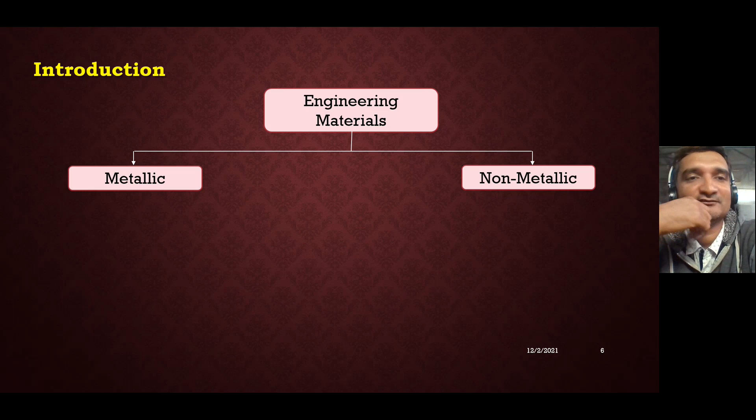A number of materials are available, like engineering materials classified into metallic materials and non-metallic materials. So we are going to discuss non-metallic materials. Here is the introduction and classification of non-metallic materials.

We have non-metallic organic materials and inorganic materials. Further classification, we can go to polymer and others in organic materials. Further, we can classify the polymer material into thermoplastic, thermosetting plastic, and elastomer.

And the other is inorganic material. In inorganic material, there is a classification by which we get ceramic materials, glasses, and others.

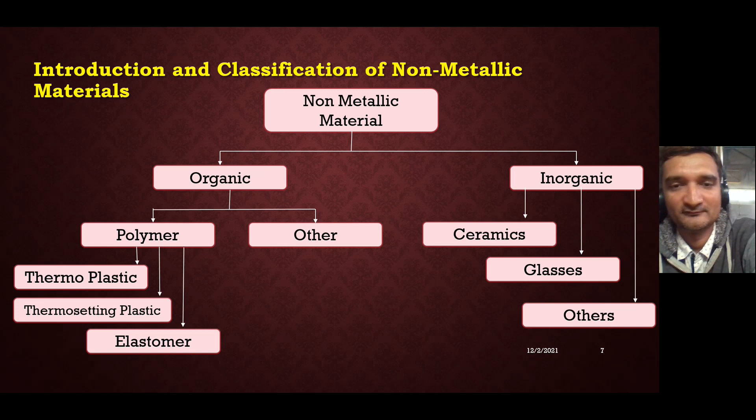So we have discussed today's chapter in non-metallic materials. Mainly non-metallic materials used in industries are ceramics, abrasives, plastics, plywood, lubricants, porcelain, adhesive, rubber, insulator, glass, cork, refractories, cements, and a number of materials used in engineering practices.

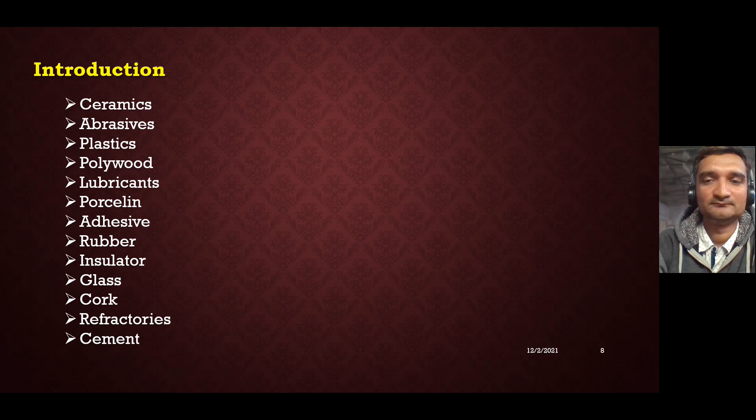Here is why non-metallic material is important for the engineering field. Non-metallic materials have less ductility, less strength, and less electrical and thermal conductivity, but the main important thing is they are less costly and have good fabricability.

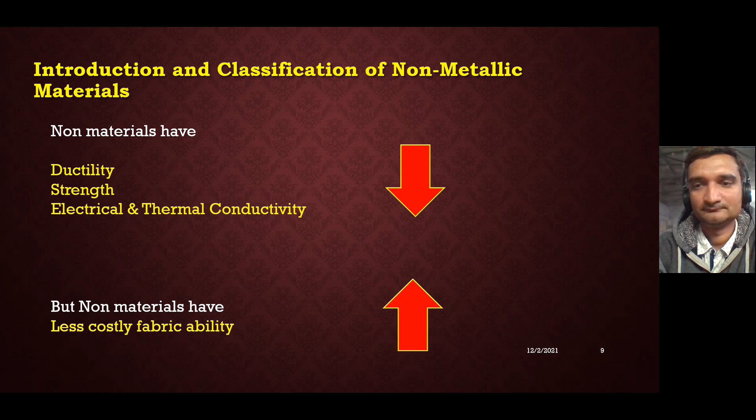So this is the plastic characteristics. Plastics have low weight and cost, and have good molding and finishing properties. It is non-poisonous and non-smelling.

We also have to recycle some plastics. This type of plastic we can recycle a number of times. But the plastics namely like LDPE, HDPE, PVC, PP, and so on are available in the market.

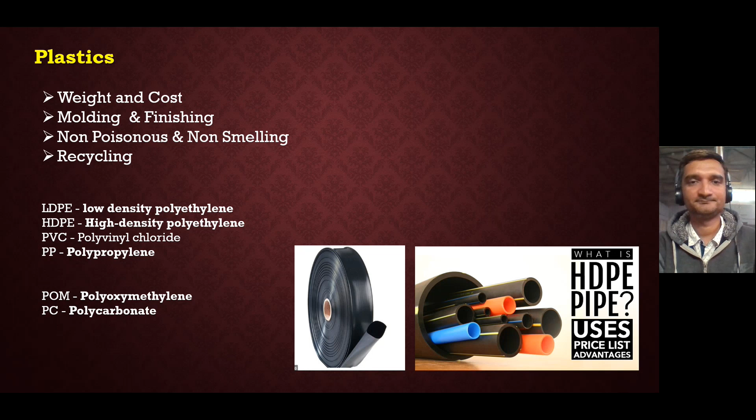This is the CPVC pipes, UPVC pipes, and PVC pipes. Already you have seen household equipment and household items made from each, like solar roofs and a number of items from pipings for drainage lines, bathrooms, toilets, etc. This is the CPVC lines, UPVC lines, and PVC lines.

Where hot water is required, CPVC pipe is used. If acid, base, or other chemicals are involved, then we have to use UPVC pipes. And if normal water or electricity is there, we can use simple PVC pipes.

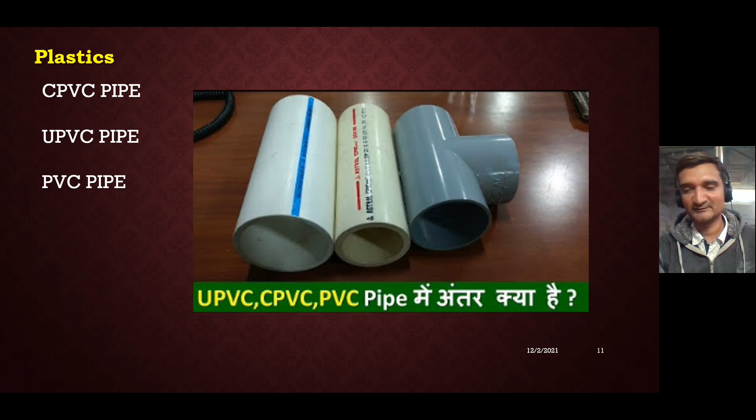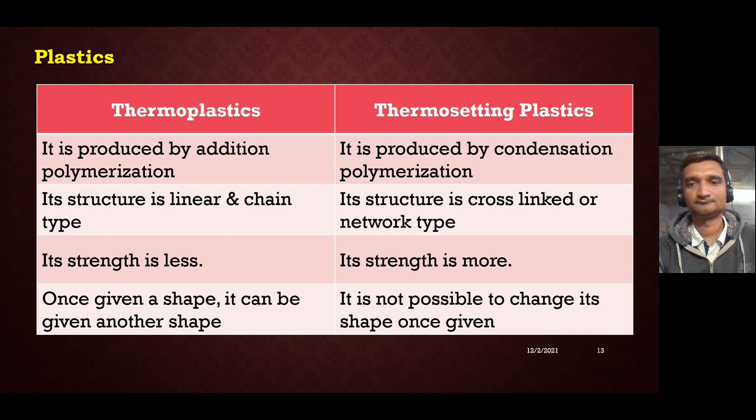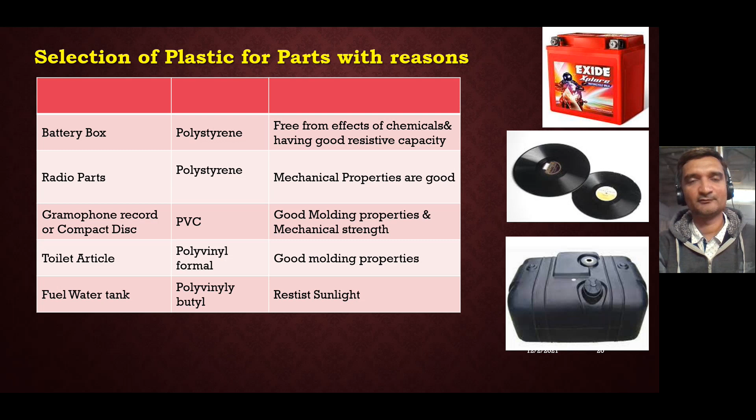It is made from polyvinyl butyral because of the property required to resist sunlight. You have already seen this in automobiles and household items. This is the actual photographs of batteries and tanks.

We are going further to raincoat. Raincoat is made from polyvinyl chloride. The main property required for a raincoat is that it must not absorb moisture. So the material is polyvinyl chloride.

Then the next item is fountain pen. The outer coating of the fountain pen is made from fluorinated polymer and cellulose, which is extruded and made into plastic. Last one is toothbrush.

We use toothbrush in the morning. It is made from cellulose. The process gives it good mechanical properties.

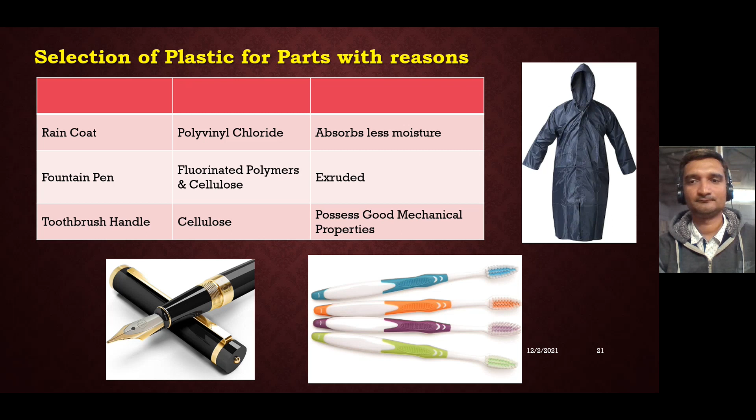Next one is button. All the buttons of machineries and switches are made from cellulose, because of the property it has: hard and strong enough to resist overall forces from outside.

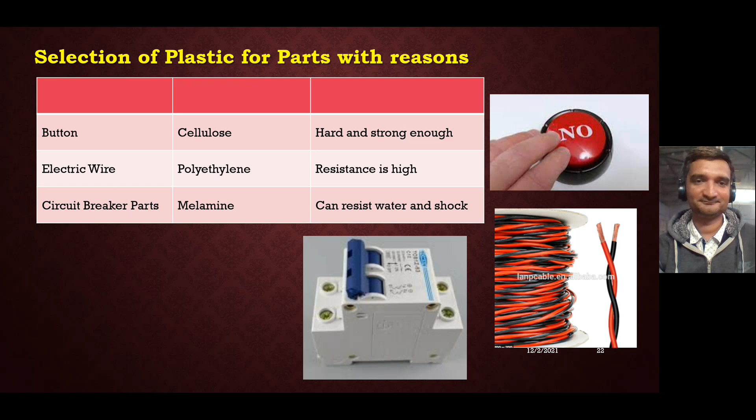The next material is radio cabinet, made from phenol formaldehyde, chosen because of its hardness and strength. Then next material is brake lining, made from phenol furfural, which requires hard and tough material properties.

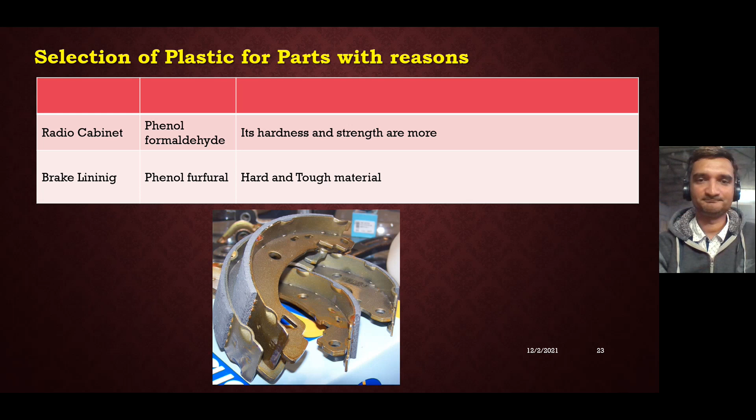Next material is rubber seal. The property of the rubber seal must be free from the effect of organic material, which is used at the level gauges of tanks and wherever an indicator is present.

Next one is lampshade. The material of the lampshade is acrylic, which must be transparent and easily shaped, so that we can get a number of items with different shapes and sizes available at home at night time.

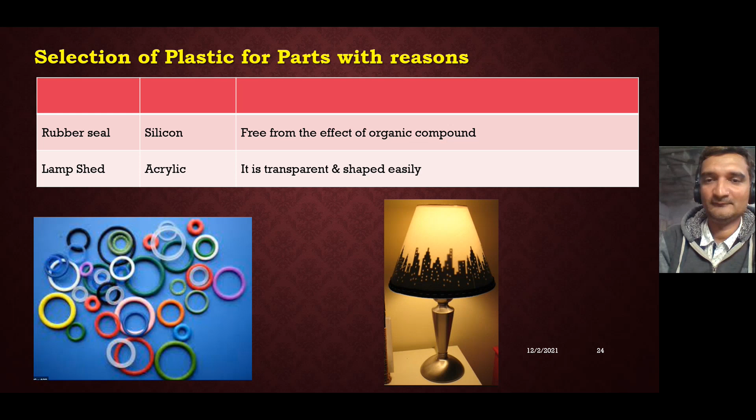The next item is fiber and Teflon. Most important in plastic material is fiber and Teflon. The full form is fiber reinforced plastic, FRP, which is nowadays a very important material made from plastic.

It is very much used in boats at sea because of the non-corrosive properties of the plastic, and also fiber reinforced plastic has a very high strength to weight ratio.

It is highly resistant to heat and fungi. It has properties inert from inorganic substances, is non-flammable, and any fault on its surface reduces its tensile strength. So these are the main properties of FRP, so that we can use it in both coastal and sea areas.

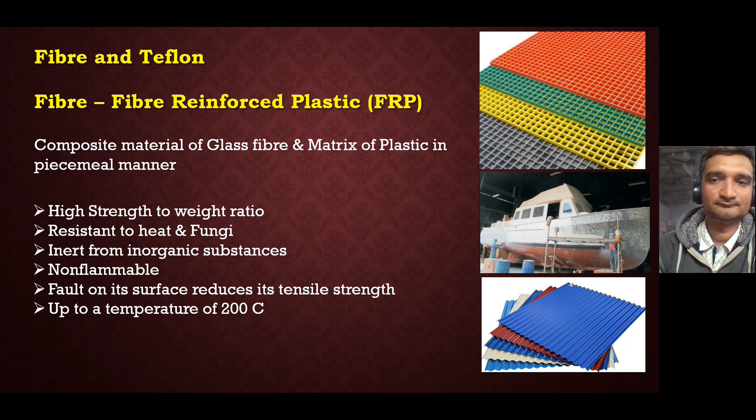This is the material of fiber and Teflon. This is also a product made from plastic, Teflon. The full form of Teflon is polytetrafluoroethylene.

The short form is PTFE. This material is mostly used in making seals because the required property is that it is completely chemically inert, meaning it does not react with chemicals like acid and resins, etc.

The next property is that the coefficient of friction is very low. It is non-flammable and remains flexible up to 200 centigrade. So whatever acid and base is present, since there is no corrosive material, we can use it. Teflon is the best material for non-corrosive items.

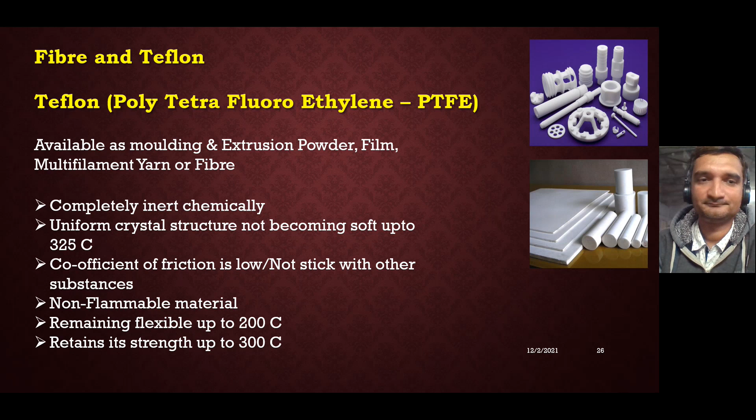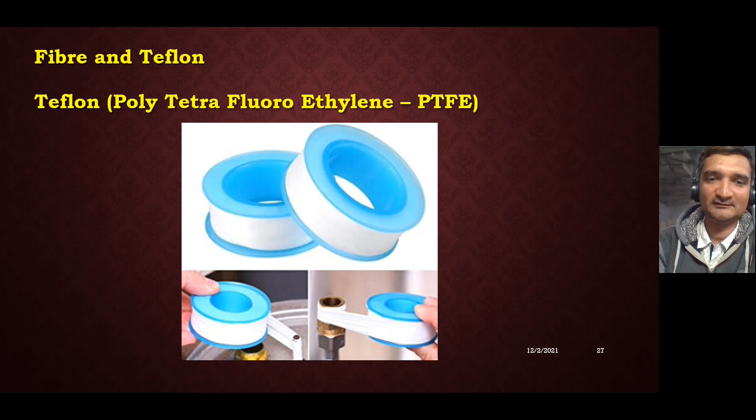This is the use on the electrical side and threading side. Polytetrafluoroethylene means PTFE, Teflon. We generally use Teflon tape in plumbing systems. Most plumbers use it to reduce leakage of pipes. The most important material is Teflon.

This is all about non-metallic material. We are now going on to composite material like metals and alloys, ceramics and polymers. So we have previously discussed non-metallic materials like plastic. Plastic is very much important in our life.